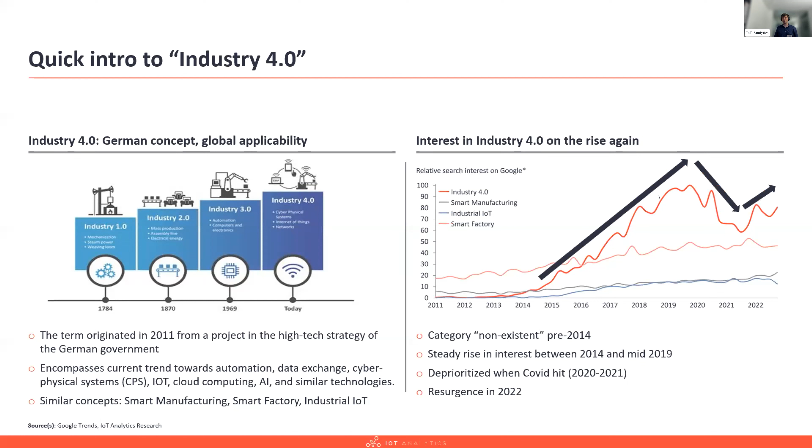One of the things we in our research always like to do is look at Google Trends, to see what topics people are looking for on Google, because it gives us an idea how hot the topics are. Industry 4.0 wasn't even existent on Google really pre-2014, had a really long period where it took off. Then COVID hit, and I think the topic was a bit deprioritized. We've recently seen a resurgence of all Industry 4.0 related topics, and you can see that in the searches. We're not exactly where we were at the end of 2019 yet, but we're getting there again. It's quite encouraging, I would say.

We've shown these before, but just for common understanding, Industry 4.0 means basically in the industry and manufacturing vertical, really looks at not only the tech stack, but also additive manufacturing, collaborative robotics, AR, VR, those things. IoT is a bit more clearly focused on the tech stack, but also outside of industry.

And then within Industry 4.0, I think it's always very important to clarify when you talk to someone: are they talking about their own smart operations? Are they talking about smart products that they are selling to customers? Both of them can be Industry 4.0, can be IoT, but it's two different worlds in many cases.

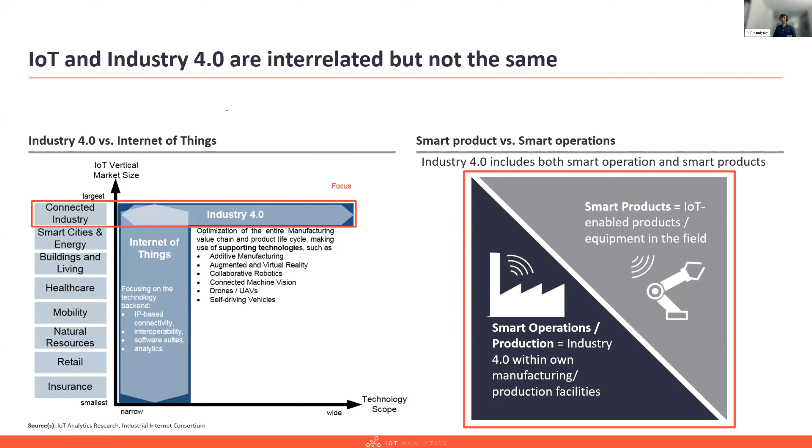With that, just as a starting point, we have some data that we're presenting today, a lot of which is from our recent Industry 4.0 adoption report we released in October. We surveyed a number of manufacturers on Industry 4.0. You can read a blog about it on the website, and if you're a subscriber to our research, you can see the entire thing and look at the data. I'm presenting a few snippets.

Before I present snippets of that report, I think it is relevant for everyone to see how bad the current economic environment is for Industry 4.0, simply because we are bombarded in the media by news about a downturn, about inflation affecting us, and just a bit of data from our research desk.

One being job data. We index the amount of open positions for Industry 4.0 related jobs to November last year. So you can see topics around cloud, IoT, platform, and we did this where we have more research.

That leads us to conclude that yes, they are declining, but not to a degree that we have to say we're majorly worried.

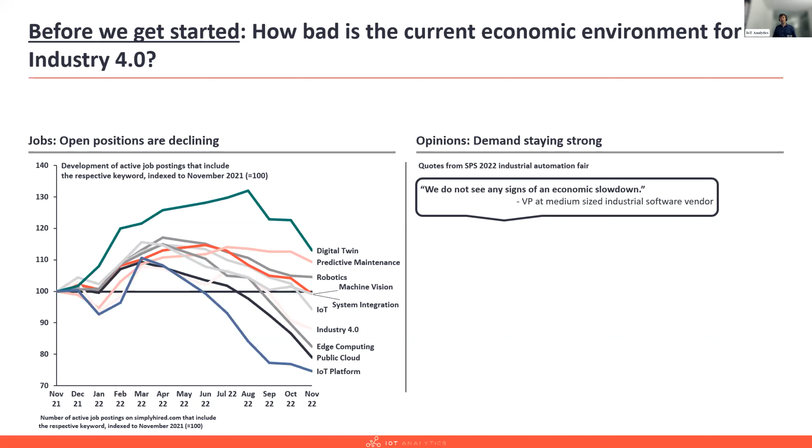Just to give you some feedback from last week's SPS fair, the Industrial Automation Fair here in Germany, we interviewed a number of people and asked everyone what's happening with the economy. We're actually releasing a report next week with our takeaways from the fair. An industrial software vendor told us no signs of economic slowdown whatsoever. A large industrial automation vendor said no downturn visible, though they were a bit worried about a continued shutdown in China affecting things, but not really.

Industrial connectivity companies said they're seeing some churn, and some customers asking for discounts, but overall it's going well. And then another medium-sized automation vendor said they don't see any real signs of a slowdown—in fact, the exact opposite. He said they used to have 3 to 6 months visibility on their order book, and now their orders are filled for the next 2 years. So I had extremely positive feedback from various people that I think is genuine.

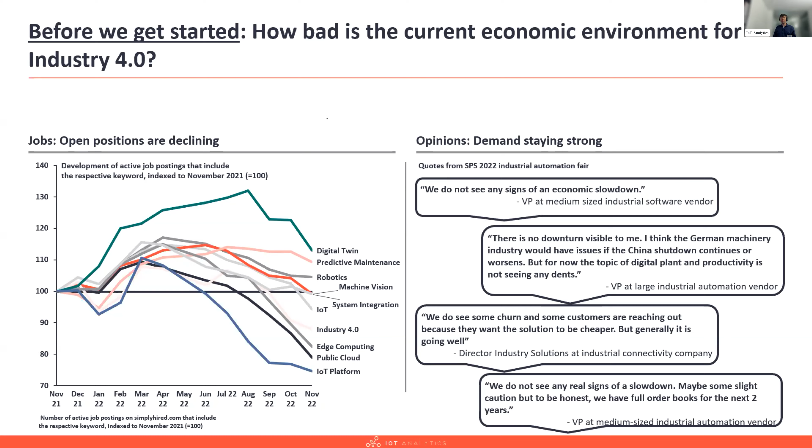So our conclusion is that even though there are clearly pockets of weakness, generally speaking this whole Industry 4.0 world, and also looking at the Google Trends chart which was going up, it's not really that affected. And you may ask yourself why, and I think we have some answers to that in our data.

First of all, 72% of manufacturers we surveyed have a smart factory strategy. A lot of them also have an IoT strategy—some of these may be synonymous, some may not. 53% have an AI strategy, and some have a smart connected product strategy. You may note some have no plans at all for this, because in some industries, like chemicals, it's a little difficult to produce smart connected products.

The interesting part is that the ambitions for the next years are really high. When we asked about a bunch of different KPIs for these companies, and looked at the average KPI improvement people claim they've had over the last 3 years, they said they've improved the average KPI 15%—so not 15 percentage points, but 15%.

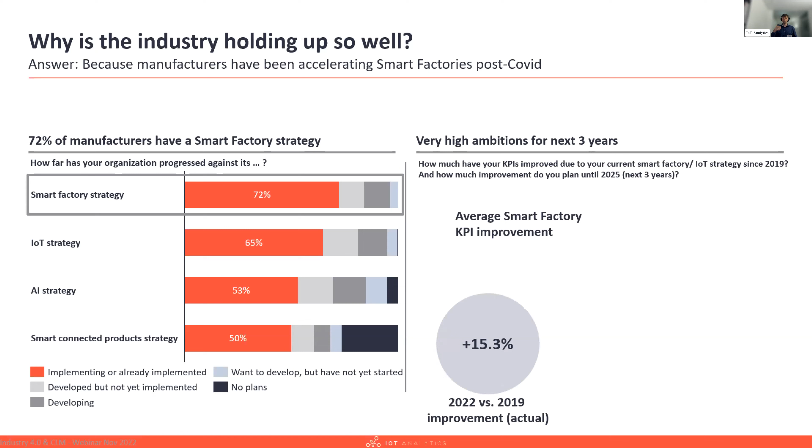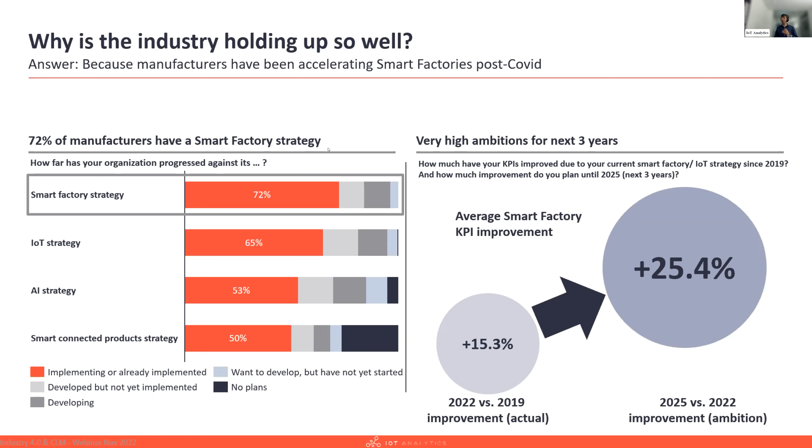When we asked them what they plan for until 2025, they want to improve every KPI. Obviously they have different KPIs—some can't be improved that much, some more—and on average, by 25%. So you see companies have much higher ambitions than what they achieved in the last 3 years, and I think that is probably one of the reasons we are seeing this growth.

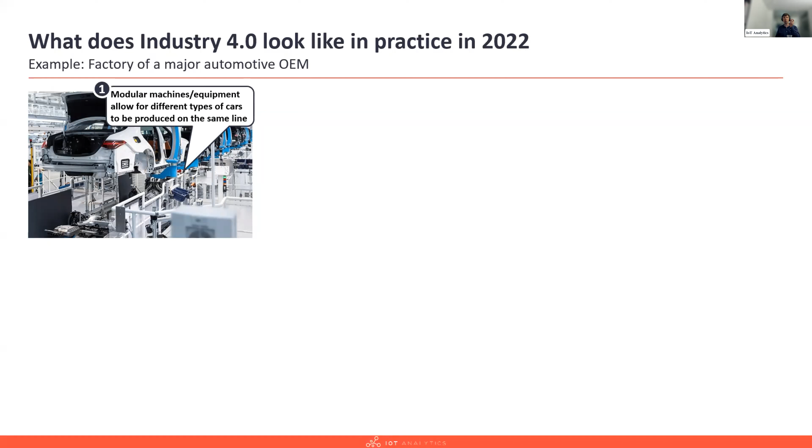The second thing is digital worker instruction, and generally this is leading to paperless operations. You used to see paper all over these products and parts and whatever—none of that now. You have these small automated guided vehicles, in some cases autonomous robots, feeding the line with parts. That's become very normal. And you have cloud and browser-based worker assistance software tools that have, in this case, the ability to alert, document quality defects, and feed into the KPI dashboard.

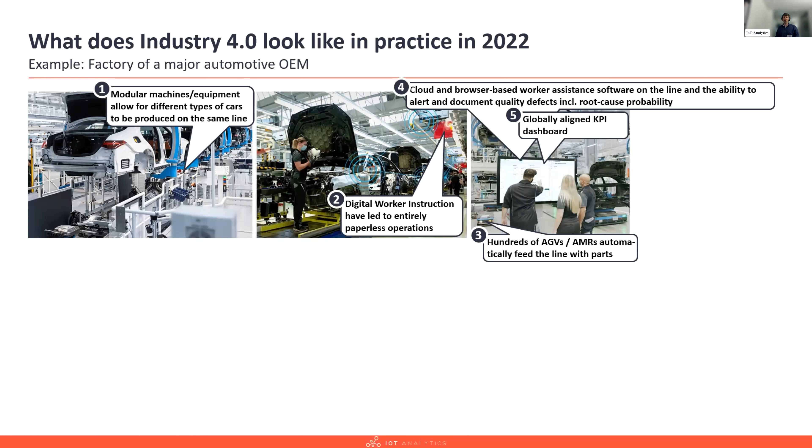And the KPI dashboard in this specific case is globally aligned in all factories, from the CEO down to the worker. So the CEO of the board essentially has the ability to click down through to every plant on every level, which is thanks to the cloud and this being a globally aligned tool.

And then what I think is actually quite interesting is that you have bi-weekly software updates at this point. So if you want to improve something, in 2 weeks you'll have an update. In the past, we were looking at this just being one-off software.

Mobile handhelds, so the worker themselves can enter quality defects and take pictures, get information, leading to engagement. The cars all have tags that allow you to see where in the factory is which car that has not been produced yet. That's via UWB technology in this case.

You have a very sophisticated MES system that needs to coordinate hundreds of individual shopping carts that are made to order and then sent to the individual car at the line.

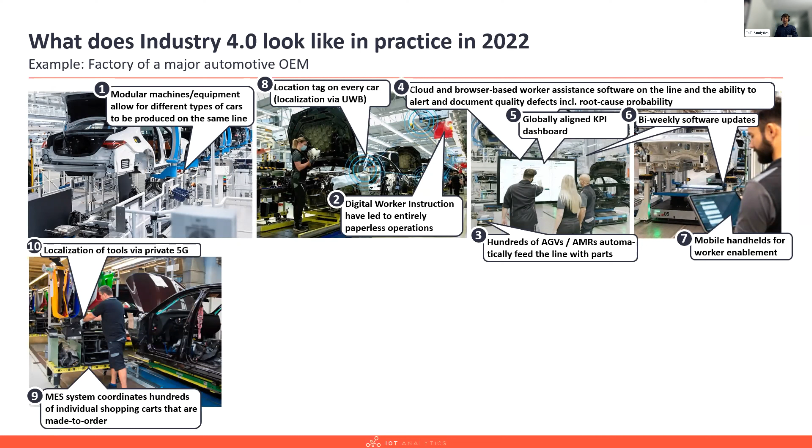You can localize specific tools like drills or something via private 5G, so you know where they are. The body shop is entirely automated with robots and with machine vision systems for robot guidance and fault detection.

And then we are talking about digital twins that allow people to simulate production upgrades. Or in this case, you want to move the arm from here to there - what would that mean? And not to forget, sustainability is playing a bigger role.

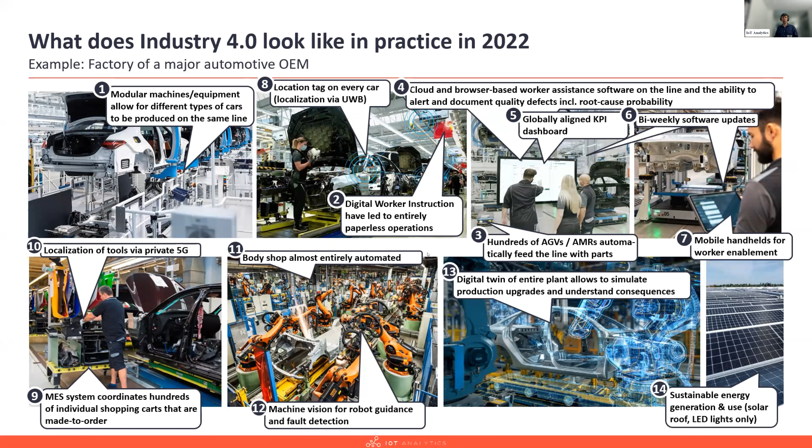In this case, the company that we were looking at, the entire roof is made out of solar, so they're essentially powering their entire plant. They're using LED lights, more efficient, and so on. So that gives you an idea of what's happening in the industry out there.

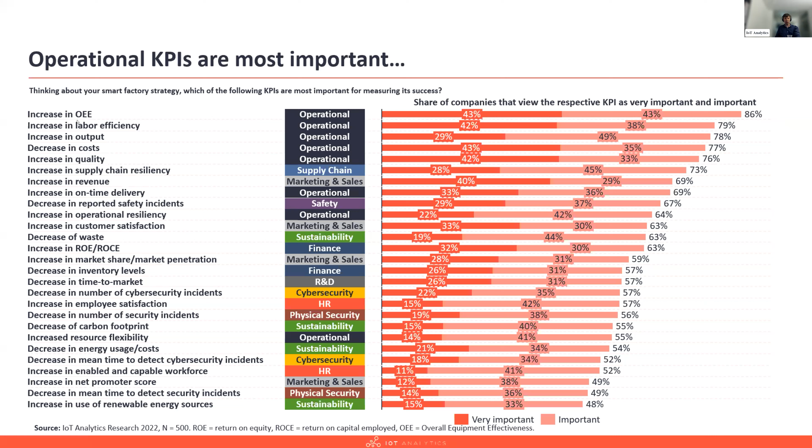In terms of the KPIs, I am actually going to jump a little bit because I don't want to go into every detail here, but OEE is the number one KPI across manufacturers, but there are a lot of other KPIs. And the interesting part is...

Some of these KPIs - this is kind of the 15 and 25% I was talking about earlier - some KPIs just have more weight in it than others.

I also want to quickly talk about the challenges, because that has changed as well. This is the only external data I'm sharing, and this is not from us.

And this really reflects also what we are hearing from different people who are having major issues with, first of all, getting the talent and retaining the talent, but also combining all these different technologies into a scalable and seamless experience.

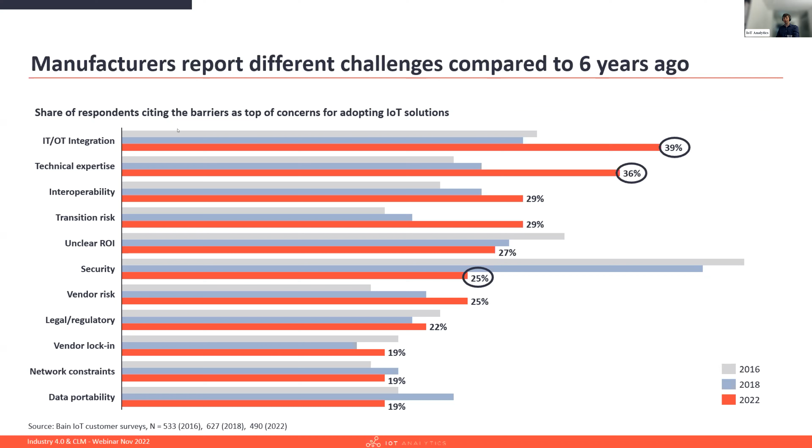I'm going to jump these because for time reasons. So I do want to get into closed loop manufacturing and related topics.

Now, we talk about Industry 4.0. There are a lot of related themes. And from our research desk, I would like to give you a couple.

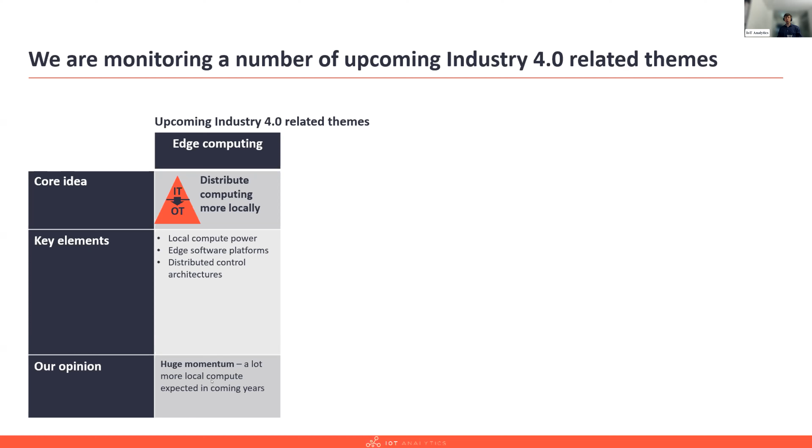There's edge computing. The core idea here is that you distribute the computing more locally, and you have things like edge software platforms. That was one of my biggest takeaways from SPS last week - how every hardware vendor is really looking at their edge software platform setup, distributing compute. We see huge momentum in this whole edge computing space, having more local compute.

There's the topic of IT-OT convergence. The idea is you seamlessly integrate IT and OT technologies - things like containerization of OT, low-code tools, IT-based development environments to have PLC programming code.

At the same time, the other way around, digital twin of an OT asset. Again, huge momentum - we're seeing a lot going into this area.

There's the whole topic of AI and IoT together, AIoT, machine learning. I would say not as big a momentum, but there's quite a bit going on there as well.

And this is where I would place closed loop manufacturing. It's yet another way of looking at optimization with Industry 4.0 tools. But the difference here is you're not looking up and down the stack, you're looking along the value chain from design to utilization, how you can close loops and make things better. We are seeing some momentum. I would argue it's a bit overlooked by some because it's a very interesting way of looking at things. It's also a bit similar to the concept of digital thread, which doesn't specifically talk about loops, but talks about having one single digital thread throughout the process, which allows you to loop back. We'll get to that on the next slide.

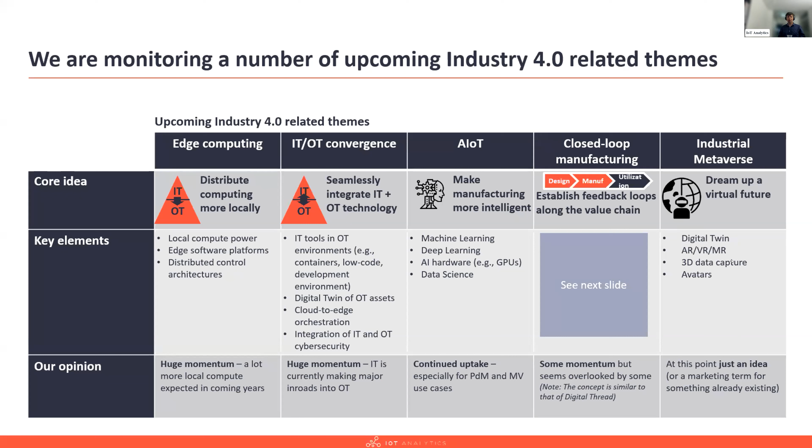And then lastly, I'm going to put another upcoming topic on here: industrial metaverse. There's still a little bit of ambiguity what this all means, and different vendors are using it in different terms. At this point, in our view, it's just an idea or a marketing term for something that already exists, although it is being used by some companies now to talk about the future and dream up what the virtual future looks like.

So today we're looking specifically at, we don't have a lot of time, one hour. So today the topic is closed loop manufacturing.

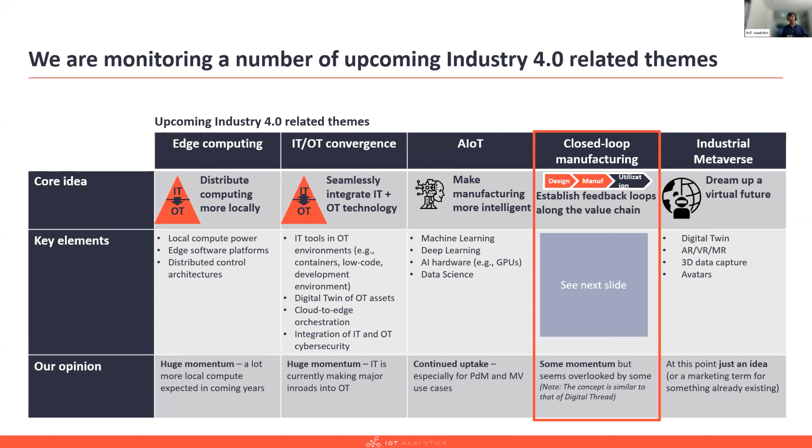And as we're going to closed loop manufacturing, I do want to talk about, first of all, what does it mean? So closed loop manufacturing, if you look at the product journey from design, engineering, manufacturing, quality, supply chain, utilization, and then perhaps field service or maintenance, there are loops, if you can.

Ideally, in a closed loop environment, whatever you have in quality feeds back into manufacturing or engineering or design. Whatever the customer says when they utilize the product feeds back again into manufacturing, engineering, or design, or whatever the field service technician says feeds back into manufacturing, engineering, or design. So that's generally the idea of closing the loop, allowing yourself to work with data as you go through.

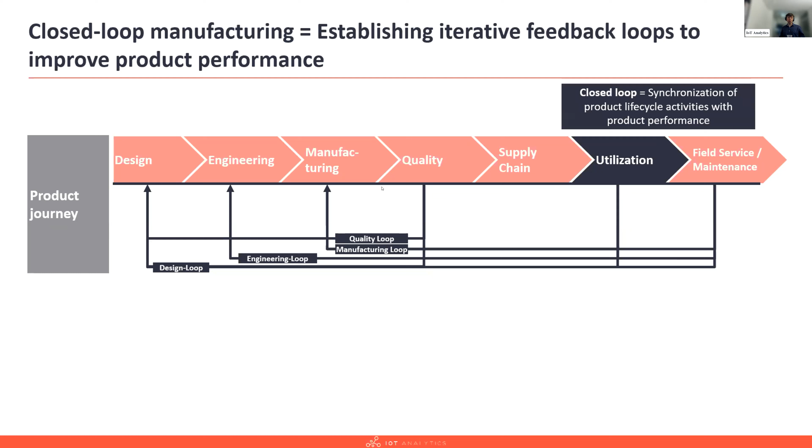So closed loop is the synchronization of product lifecycle activities with product performance. There are a number of key tools for closing the loop, mostly existing general software. So you have CAD for design, you have CAE for engineering, you have MES for manufacturing. You could feed some of this into your ERP. You could have an IoT platform, a bit more modern. Your product lifecycle management is part of this. Digital twin plays a role, and data analytics plays a role.

And the whole thing, why are you doing it? With the goal to improve product quality, reduce scrap, increase customer satisfaction. And so today, we don't have a lot of time, but we're going to have a specific focus on the part that sits between manufacturing and quality.

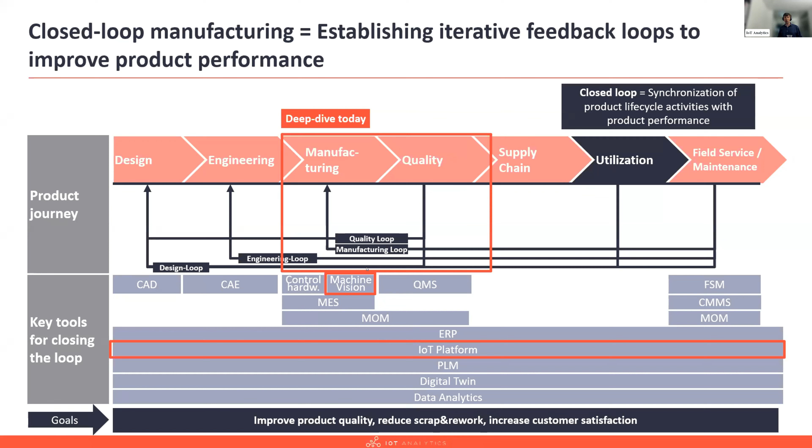We do want to highlight the topic of machine vision, because it's something we are currently doing quite a bit of research on. Fernando has been working on that. And we do want to highlight the topic of IoT platform, again something we have been researching quite a bit. But Raphael is going to talk about that as well, because they also use an IoT platform for their closed loop. With that, I hand it over to Fernando.

Thank you, Knud. Hello, everybody. So yes, we've been working on the topic of machine vision, and to set things clear from the beginning, we want to first share what we talk about when we talk about machine vision.

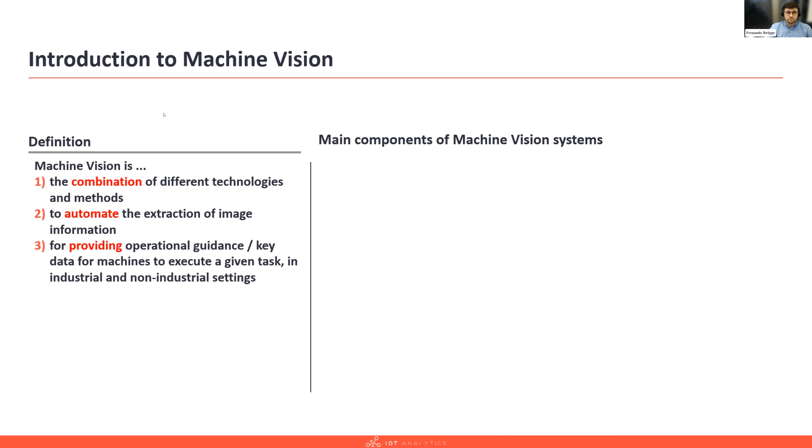So we consider machine vision as the combination of different technologies and methods that enable the automated extraction of image information for providing operational guidance or key data for machines to execute a given task, either in industrial and non-industrial settings. So here we have a short example of the different main components that we have in machine vision systems.

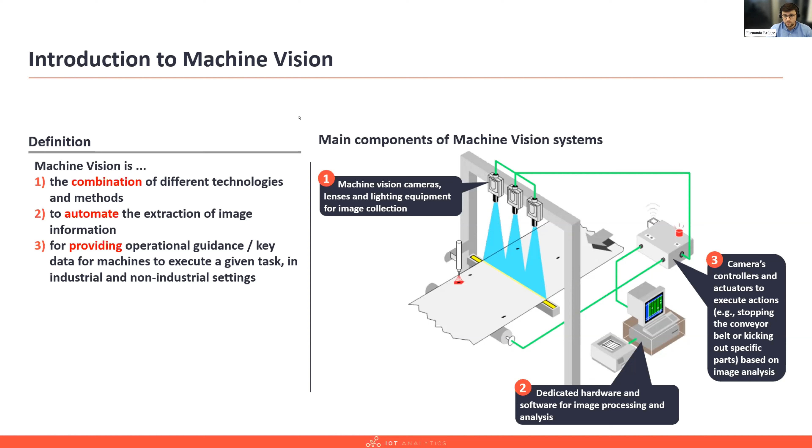So first we will have the machine vision cameras, lenses, and lighting equipment for collecting the images. Then we will have the dedicated hardware and software for processing and analyzing the images. And then a third main component are the camera controllers and the actuators to execute these actions, either stopping the conveyor belt or kicking out some specific parts based on the image analysis.

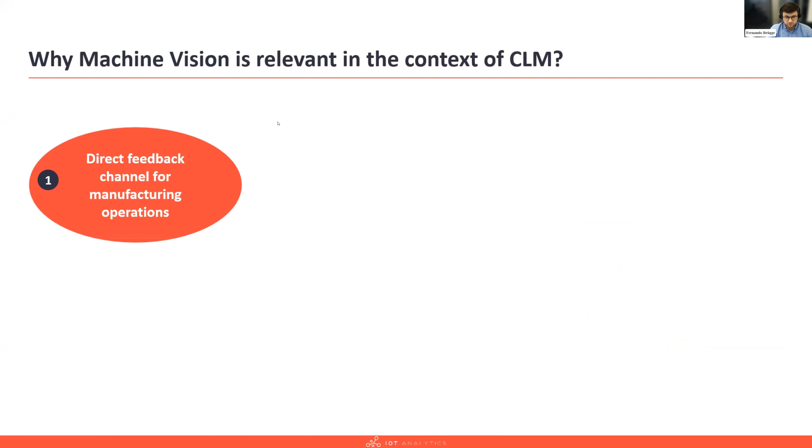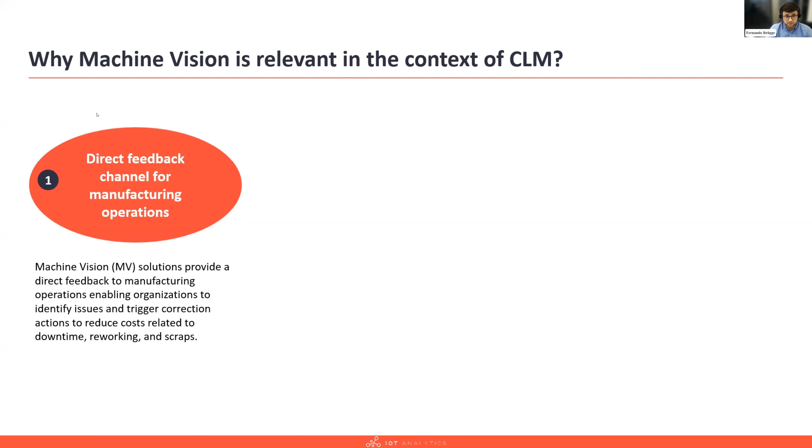Now, moving to the next slide: why is machine vision relevant in the context of closed loop manufacturing? We identified three aspects. The first and most evident is that machine vision provides a direct feedback channel for manufacturing operations, helping organizations identify issues and trigger actions to compensate and reduce costs, like downtime or reworking faulty parts and scraps.

The second main reason is that machine vision solutions provide an accurate and reliable quality control system. Compared to manual checks or traditional quality inspection, machine vision can enable continuous, repeatable performance 24/7 at 100% accuracy, at speeds the human eye cannot match.

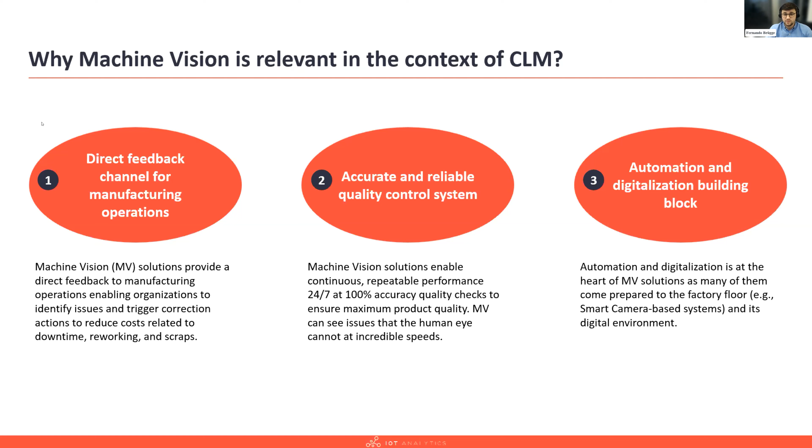The third reason is that machine vision is one of the key building blocks for automating and digitalizing manufacturing processes. Automation and digitalization are at the heart of today's machine vision solutions, since many of them come already prepared for the factory floor or adapted to specific digital infrastructure.

A last insight we collected from our investigation is that machine vision ranks as the top ROI use case in all our surveys, mainly driven by recent advancements in AI, edge compute, and image sensors.

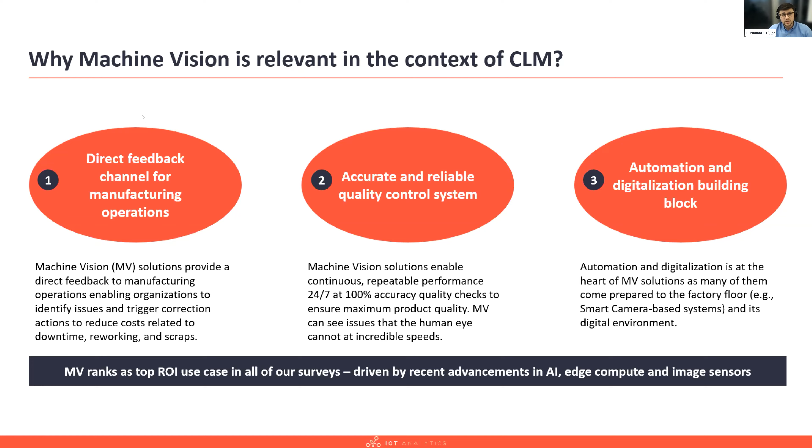Now we've prepared a short example of how machine vision could enable closed-loop manufacturing. In this case, we have the French company Numalliance, which produces CNC bending machines and developed a fully automated tubing production, inspection, and correction system.

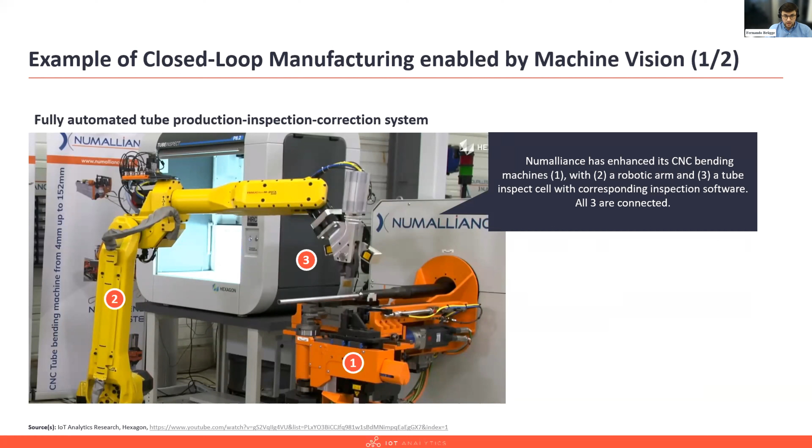The company enhanced their machines with a robotic arm and a tube inspection cell with its corresponding inspection software, connecting all these parts together.

The system works in a way that metal tubes are first bent with the CNC machines, then picked and placed into this inspection cell or chamber by the robotic arm, shown here in yellow. Then the system in this cell inspects the parts using 3D cameras.

If the system finds a defect in the bending profile, it automatically sends batch correction data to the CNC bending machine and reboots the entire machine bending trajectory without any operator assistance.

One interesting fact, related to what we highlighted previously on why machine vision is relevant to closed-loop manufacturing, is that the inspection system comes with some factory floor ready features.

One of them is that the cell comes equipped with a 3D glass reference surface to accurately track and position the images, compensating for environmental factors.

For example, high temperature could cause cameras to move, which could affect the accuracy of the image positioning or the calculation of the bending of the tubes.

Another feature the system comes with is a troubleshooting mechanism to flag whenever a camera is blocked or dirty.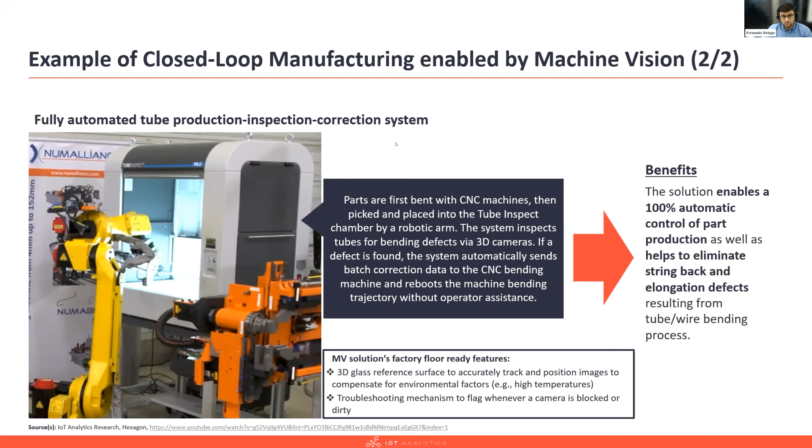Now we'll hand over to Raphaël, who is going to explain a little bit more about closed-loop manufacturing. Thanks.

Thanks, Fernando. We can see your screen, Raphaël, but we can't hear you yet.

Hello everybody, I'm very happy to welcome you today to my part of the presentation about closed-loop manufacturing. I want to rebound on the fact that Knud explained the actual situation of the jobs in the Industry 4.0 context. I think the situation is not so bad, and the reason is we are now facing instability in our general situation.

If I talk about COVID, war, supply chain issues, or an energy crisis, I think those topics are even more relevant today for manufacturers to be more accurate, more efficient in the production process. That's also a reason why today people in this field are looking more and more at what solutions can help them become better.

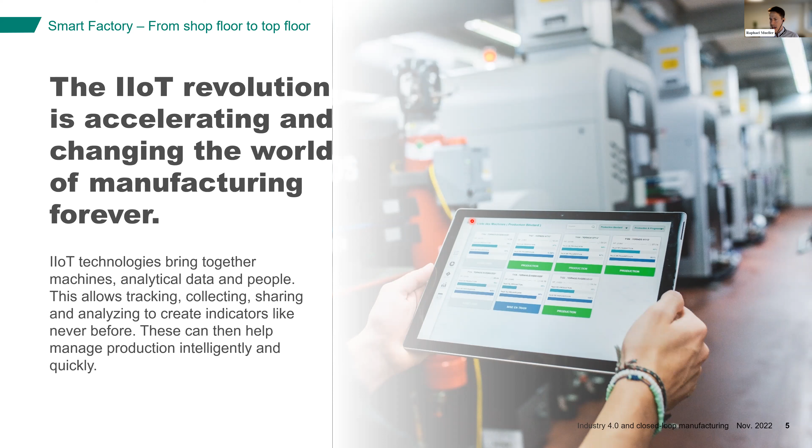Now about IoT, or more precisely IIoT - Industrial Internet of Things. At Brütsch-Rüegger, as an integrator, we really think this revolution will accelerate and change the world of manufacturing forever. There are many technologies available today that allow us to connect machines, but also people, to track data, collect data, and share that data. We also have powerful analyzing tools, and at the end of the day, these insights help us manage our productions - or the shop floors - more efficiently, and take decisions faster, based on real data.

We're seeing a move between something everybody knows - MES, Manufacturing Execution System, which is the traditional way to streamline operation and production at the shop floor level. This is seen as a monolithic system, meaning it's hard integration, a silo, going deep into the process but in a vertical way. Compare that to IoT platforms, which have been on the market for maybe 5 to 7 years - they're much newer in this game.

They are really new in that game, but they have another way to be integrated into this architecture - not vertical, but horizontal. We can see them as an umbrella over the whole company, allowing us to much more easily integrate different types of services, equipment, or software. When we see this at the opposite of the monolithic integration, we see it as a joint architecture. I'll try to explain where the differences are between these two main topics.

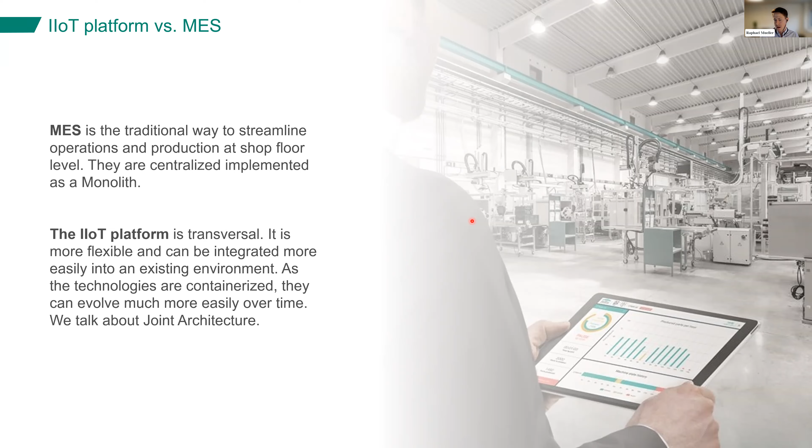Looking at the architecture as we know it, I'm not really sure IoT platforms will replace MES. MES are already very well integrated and have a very deep understanding of the process. I think IoT platforms will run parallel to that actual architecture - bringing new solutions, with the transition from MES to platform being smooth and taking time over the years. It won't be that a customer says 'I want to exchange my MES with the platform' - it will be more of an evolution.

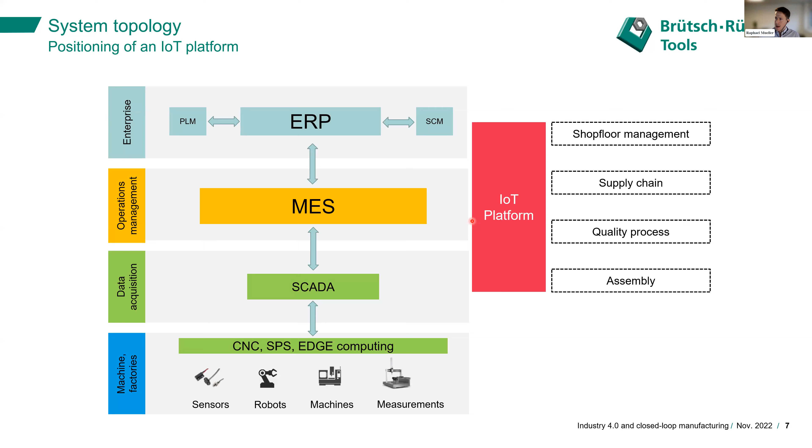And then after that, we will see which system will take the biggest place in this architecture. If we compare them with some insights or key facts, the IoT platform is really seen as a joint architecture between microservices, not only at the service level or apps level, but also at the edge level. So every object is seen as a different data source, and we try to connect all these equipments together, linked to a platform.

And then after that, all the data are at the same place. And thanks to this architecture, it will be much easier to integrate all the services on top of that. So it's really a kind of middleware. The platform is really transversal over the organization. And that allows us to have high flexibility through the microservices, just using the services we need and not the ones we don't need, instead of having a big software with a lot of features, and at the end of the day, just using 5% of them.

On the IoT field, we also have the chance to join two worlds: the edge and cloud world. So it's a kind of hybrid integration, and that allows us to use the cloud power that lets us, for example, do AI without needing a large edge infrastructure. So it's really a data-driven manufacturing environment.

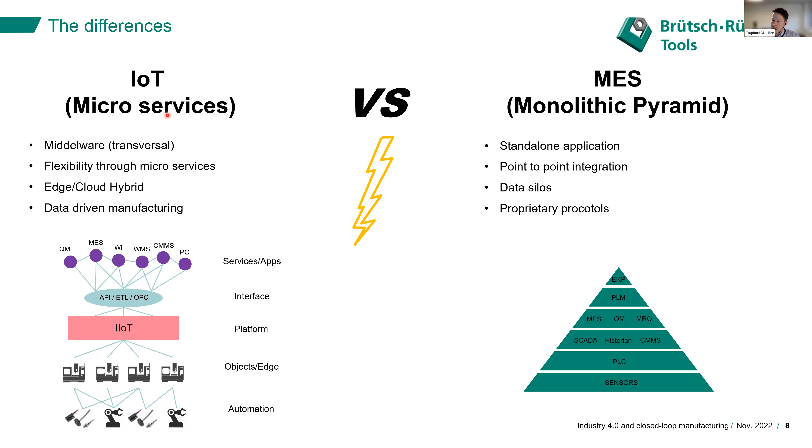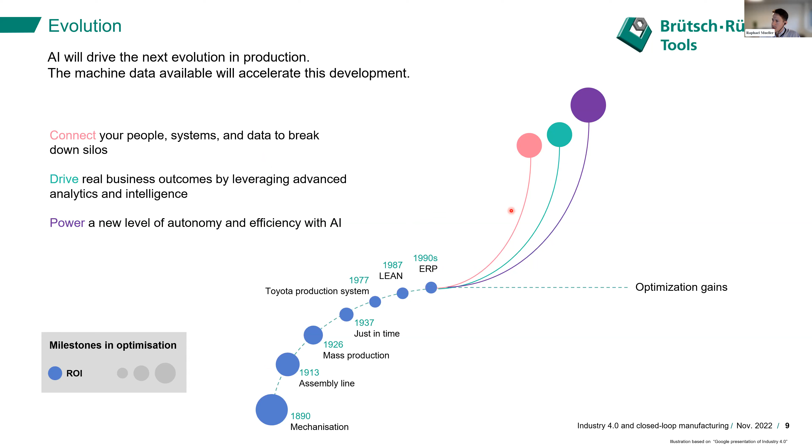So I wanted to point that out because I think it's a very good chart, and it shows how the evolution is at a turning point right now, and we're starting a new journey with some new technologies. There's also another chart I like to use when we start a project with our customer: this Industry 4.0 evolution chart.

If you look briefly at these 6 steps, of course we want to focus on the top of it, and we talk about doing predictive maintenance. Then we have adaptability, which is today's topic, with the self-optimizing closed control loops. But actually it's not possible to start an Industry 4.0 or digitalization project directly in that dark blue zone. We have to go through the different steps and do the work over there; otherwise it will never be possible to jump directly to the top.

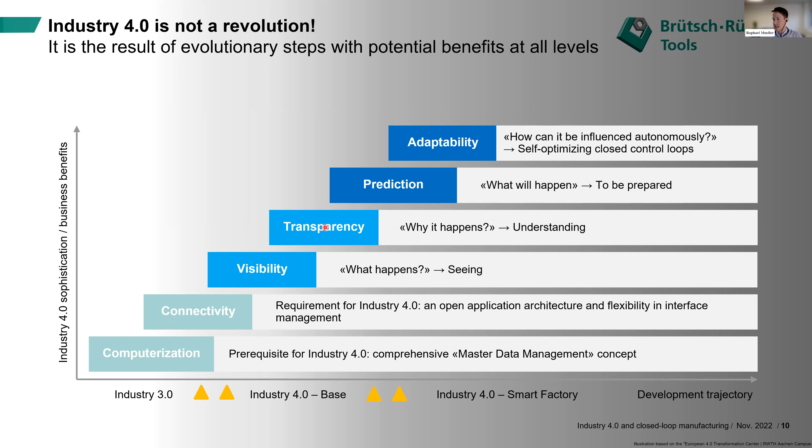We don't have to forget that each step has some business benefits, even the first ones. So it's mandatory to go through all those steps, to split the project into different phases. And of course, we need a vision. We need to know where we want to go, but we must never lose focus on the actual project. That's also a very important point.

I have another example I'd like to show you. It's a real example from a customer of ours, and I want to show the difference between facing a problem with real-time data versus without access to real-time data. Let's take our customer. In this case, it's the COO of a discrete manufacturing company, named Jimmy, and Jimmy received an order from a customer to produce 10,000 parts. For everybody, discrete manufacturing means production of single parts. There is no assembly process. So 10,000 parts to be produced.

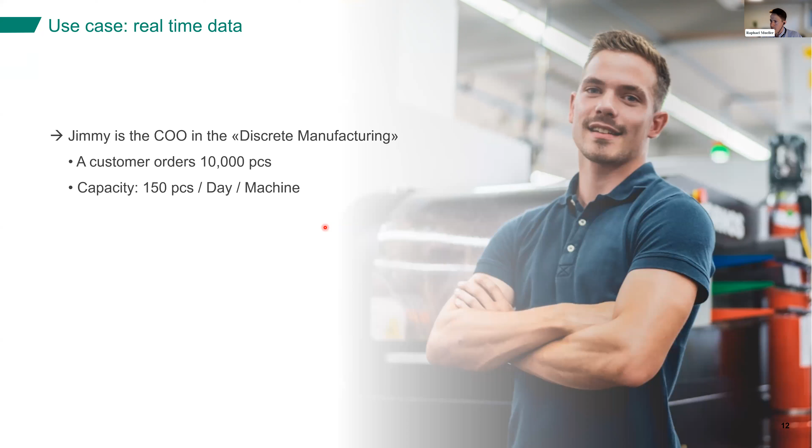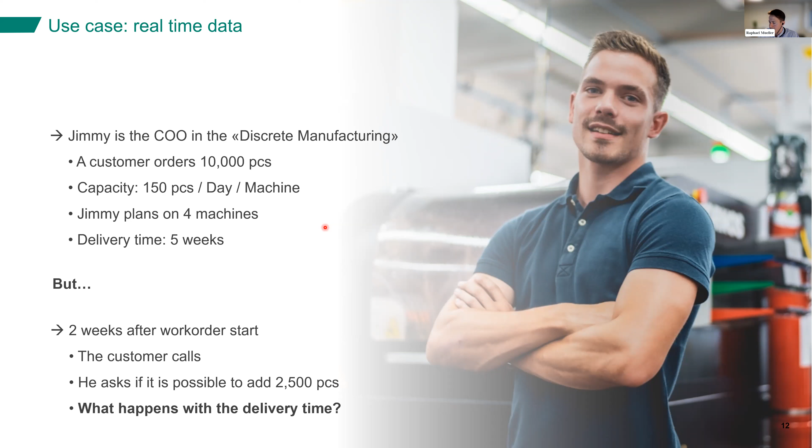He has a capacity for producing that part of 150 parts per day per machine, and Jimmy decided to plan this work order on 4 machines. That means he has a delivery time of 5 weeks. But as always, there is a but. Something happened: the customer calls 2 weeks after the start of the work order and asks if he could add 2,500 parts to that work order. So what happened? Jimmy has to check what will happen with the delivery time at the end of the day, if he'll be able to deliver those parts in the same time without having an impact on the other customer orders. So let's see what he will do.

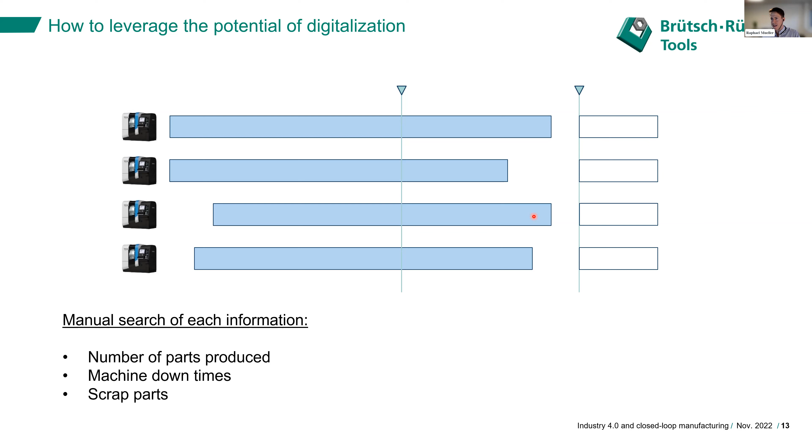In a first step, in an environment that doesn't connect the data or the machines, he would have a theoretical planning. So 4 machines, the work order started on these 4 machines, and he has to get the data from the people or from different systems. This is a kind of manual search process. He'll have to check how many parts were produced until today, what was the reason, because maybe he didn't reach the target he was expecting. He has to check how many scrap parts they produced in order to understand what room he has at the end to be able to produce those extra parts. So this job is possible, but it's manual, and he has to go through different kinds of information, put them together, and then at the end of the day he's able to answer the question.

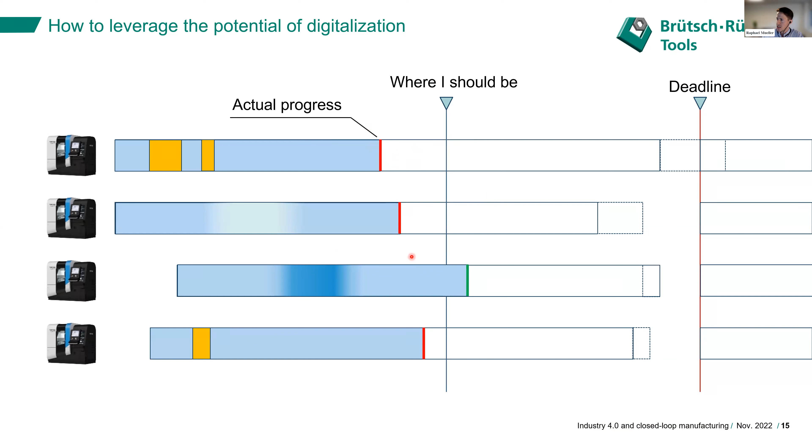Now what happens if Jimmy has access to real-time data? He'll have another type of planning, a kind of dynamic planning. The planning will show him where he should be right now at the moment, and it will also display the actual progress. We can see here we're maybe late on several machines, we're ahead of planning on some others, and we can also see the detail about this situation. So for the customer, it's much easier to understand: okay, this downtime was something expected, or this performance issue was also something expected. With all that data, at the end he has directly the answer: do I have the capacity to absorb this extra 2,500 parts? And I'm able to deliver those parts to the customer without having an impact on the deadline and on the next work orders planned on those machines.

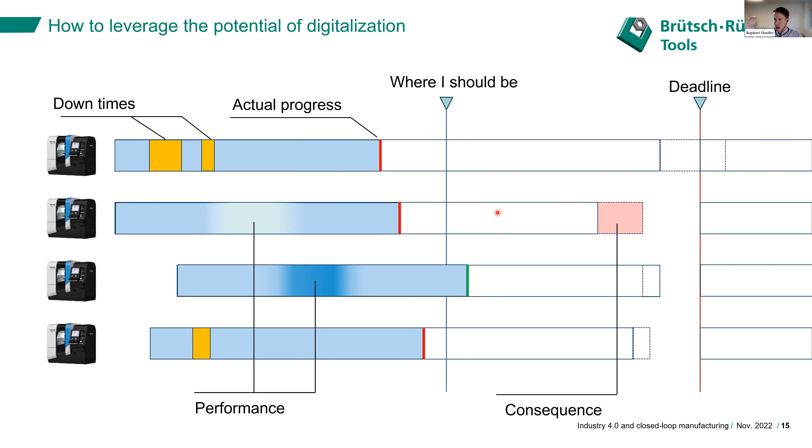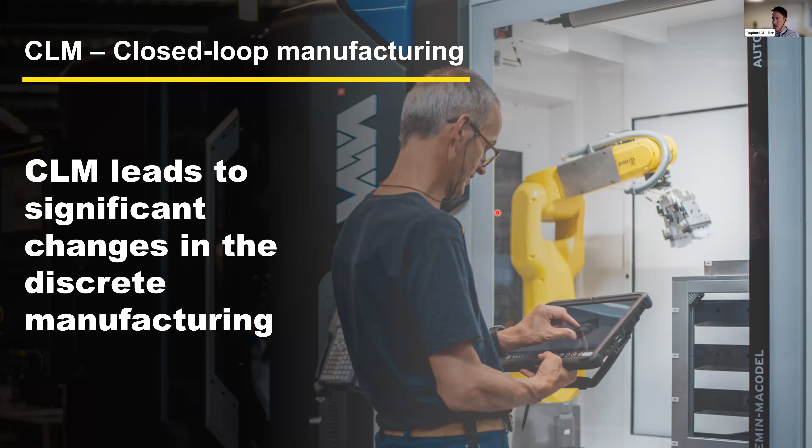So, closed loop manufacturing. For us, CLM will lead to a significant change in discrete manufacturing, and I'll try to explain right now why. Let's take a current adjustment cycle on a machine, again in the discrete manufacturing field, single parts production. So we have a part that will be produced in mass production. We're talking about several parts, machines running 5 or 7 days a week, 12 or 24 hours a day.

It's to understand if the process is stable and if my dimensions are still in the target, so if I'm not getting out of tolerance. At the end, the operator will have to check the result of the measurement process and calculate by himself if he has to adjust the machine. Then when he has calculated those offsets, he will have to input those offsets into the numerical control directly on the machine, and then produce again. So that's why we call this already a cycle.

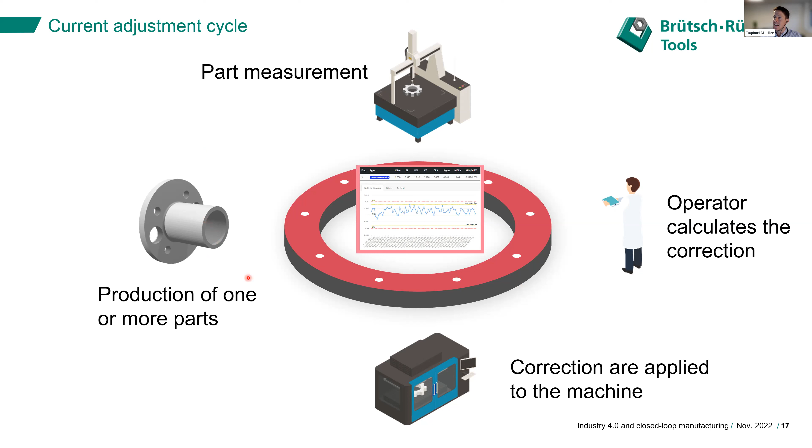And what are actually the point of failures? The operator has to input the correctors directly in the numerical control, so there is a risk of inputting something wrong. The operator has to calculate those corrections by himself, so there is also a risk of doing something wrong. And why are we facing that problem?

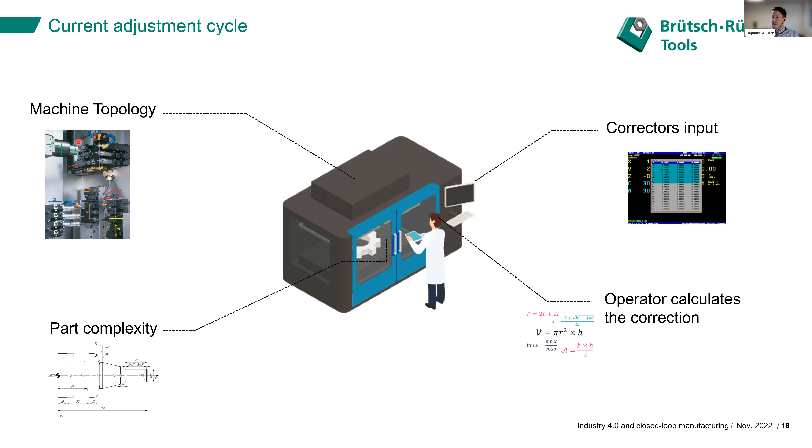It's also because the parts are always more complex. We always have more complex parts, but this is directly linked to the machine topology also. The machines are always more able to produce difficult parts with more axes, more tools, more options. That means the parts are complicated, and at the end of the day it's difficult for an operator to really have everything in his head to understand how he should correct the machine manually.

There is also something that is really well implemented right now: statistical process control, what we call SPC systems. It's by measuring parts at a certain time, each time of day, and then using those measurements and the history of that data to create statistics and understand exactly how often I should control my parts to be sure to stay within this average or acceptable area. This is totally based on statistical calculations, not really linked to machine data or something else.

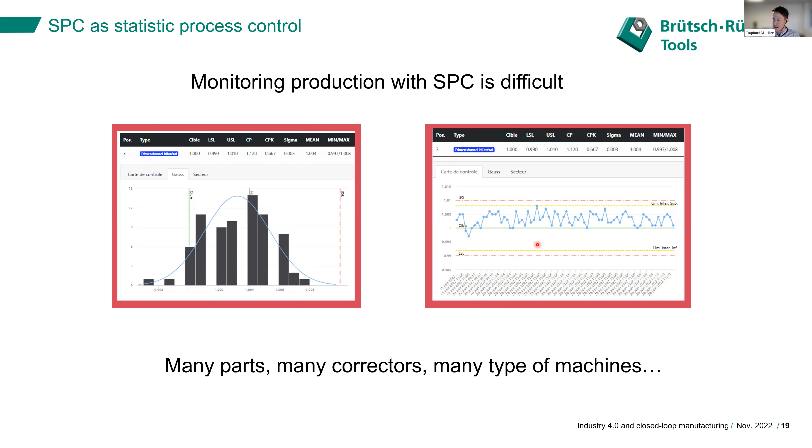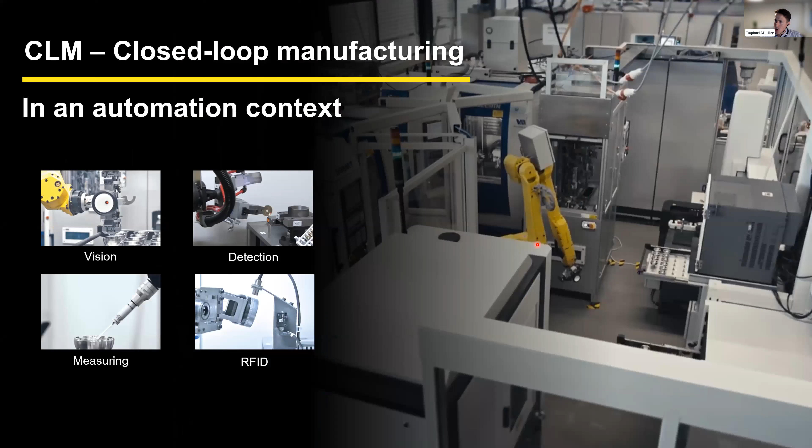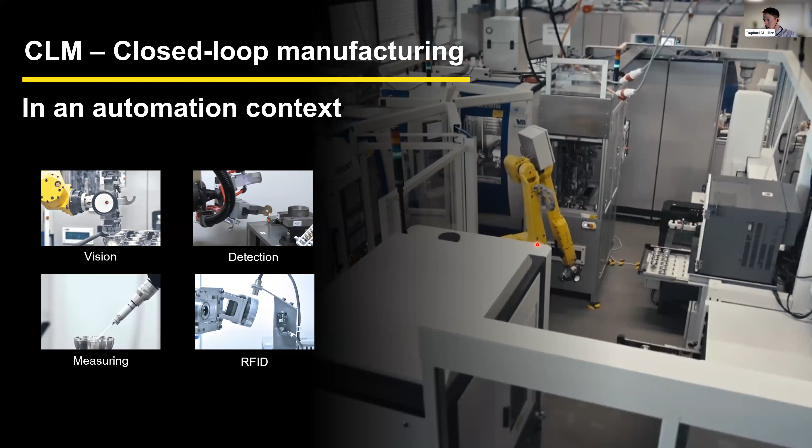Now we are seeing more and more closed loop manufacturing, where we are able to connect machines together, and this whole loop is getting more and more automated. I've chosen two contexts where you can see closed loop manufacturing. The first was mentioned by Fernando at the beginning of the presentation, the Alliance machine with a bending process machine, a hexagon measurement machine, and a robot. It's exactly this type of machine—an automation context with some vision, part detection, measuring tool, RFID chips.

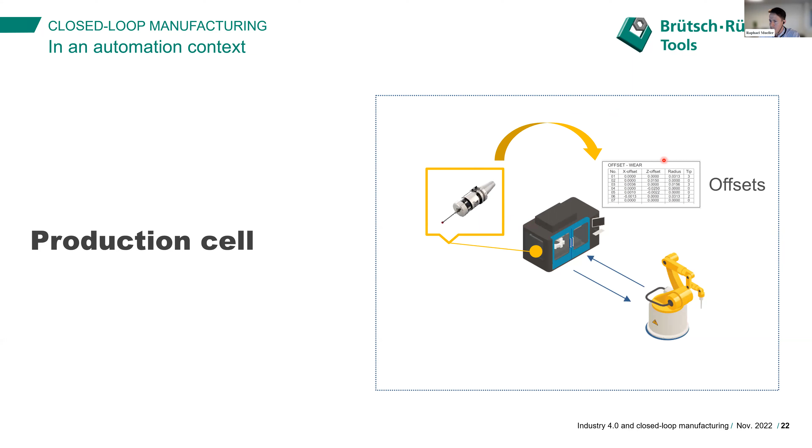This is something we've already seen for many, many years, so it's not really new. We call this a production cell. We have a machine linked to a robot, and a kind of measurement system. It can be directly integrated to the machine, or as in Fernando's example, another machine next to it. This system will measure the parts directly and will be able to autocorrect the machine if we are facing dimension issues. So this is a typical production cell, something already at production facilities for many, many years.

But there is another way to see closed loop manufacturing, and in an Industry 4.0 context this is totally different. Now we will not talk about exactly the same components—we will talk about machines, connected tools, master data management, and networked components. And that opens completely new doors.

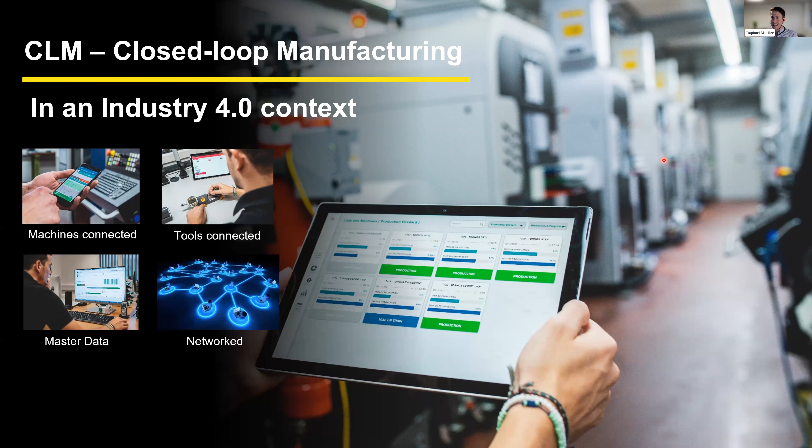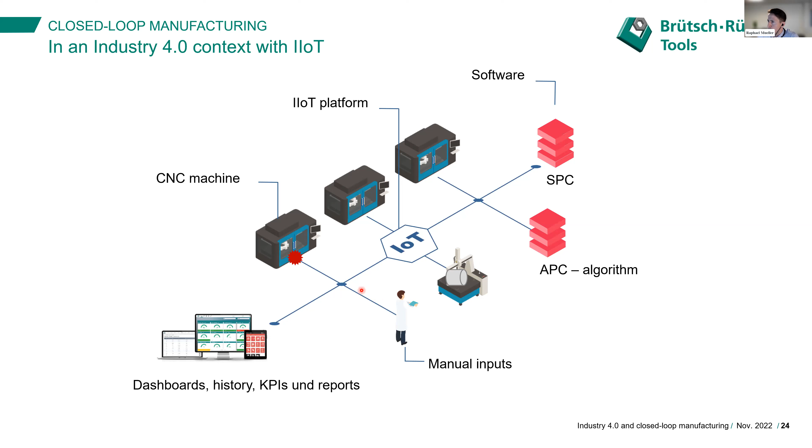The machine will produce a part. This part will be measured on a measurement system, and this system will generate data that will be stored into the QM system for history, but will also go to an algorithm, and this algorithm will send the correction automatically to the machine. So if you look at this architecture, it's not really talking about a production cell anymore—it's about making all those objects talk together and creating a cell with the whole shop floor. That's actually the main difference with closed loop manufacturing in the Industry 4.0 context.

Just to sum up and give the overview: on the left side of the screen, the first example, and on the right side, the digitalization example.

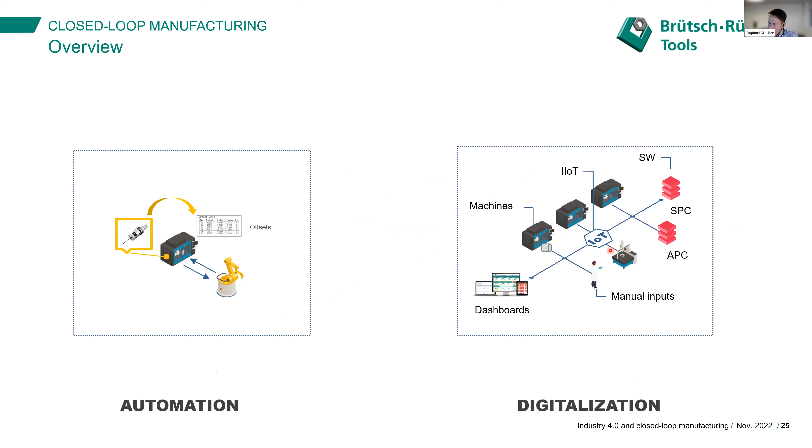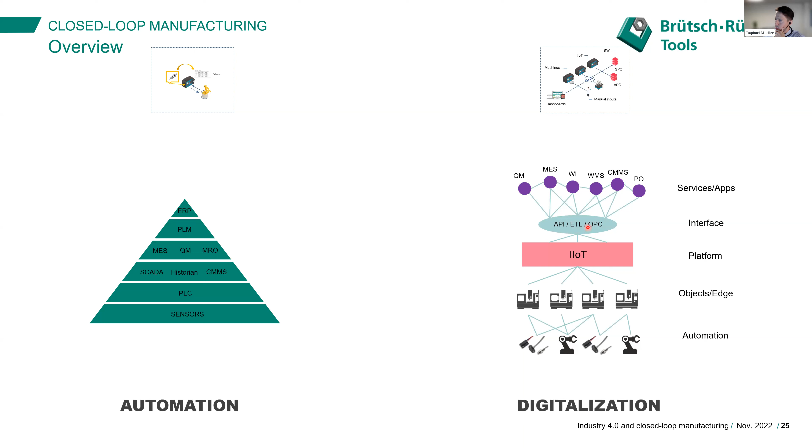If you remember my slide back in the presentation, we defined this concept of having a monolith on the left side of the screen, a standard way of integration. On the digitalization point of view, really talking about microservice philosophy. Everything is becoming a service or an object, and everything is working together. We don't have to replace or buy or create a new cell, we can use all those objects to make them work together. That's the real closed loop manufacturing concept we try to show to our customers.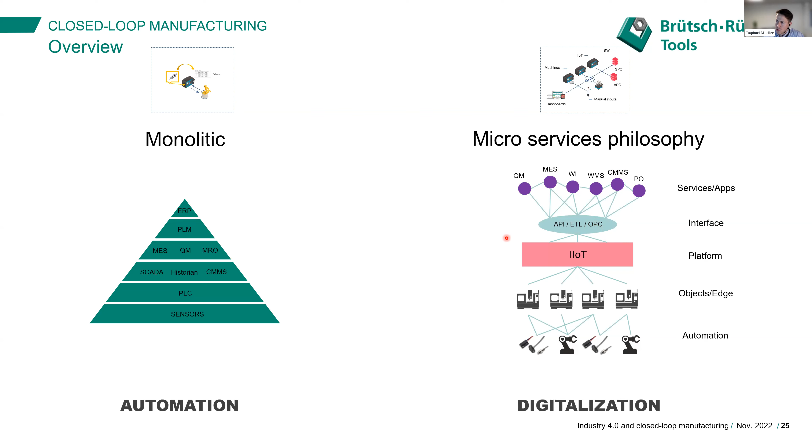I have tried today to put together some information about a use case. It's a customer in the watch industry. As you maybe know, the watch industry is a kind of market where people don't really like to talk together. There are a lot of secrets, everybody wants to keep their secrets and their manufacturing process.

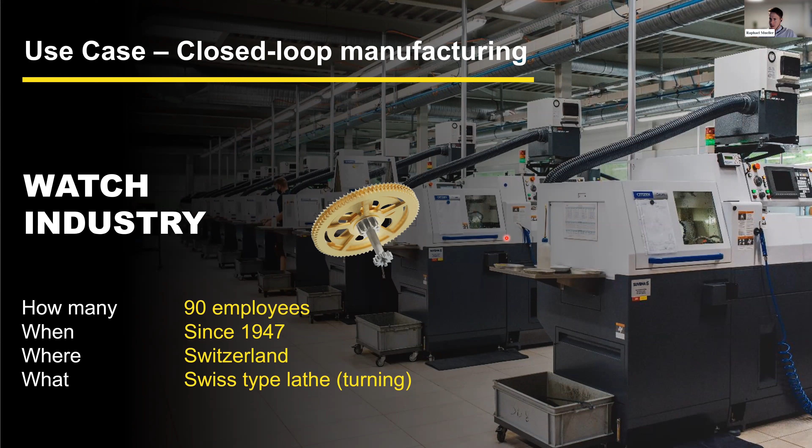But what I can say is this company has 90 employees, it's an SME, small and medium-sized company. It was created in 1947, based in Switzerland, and they are specially focused on Swiss type turning machines. For those who don't know, those machines run normally 7 days a week, 24 hours a day, fed by a bar, turning and producing parts as a mass production process. So machines that run the whole day.

This customer came to us and had several difficulties. He said, I have some parts that are always more complicated, so my operators have issues calculating this correction. I also have difficulty finding the resources. I think this is a worldwide problem, to find people able to fulfill those requirements.

Next to that, he also wanted to optimize his OEE, he had noticed there is potential to be improved. And he said, if that can be a side effect of my project, I want to go deeply into this topic also.

So let's take the integration process of that customer. A mass production of those watch parts, a machine park dedicated to those parts of 8 CNC machines, and some measuring equipment - again, not dedicated to a machine, but to a workshop, and several kinds of measuring equipment. Then taking the workflow, the part is produced on those machines, then will be measured on those equipments.

Next to that, an algorithm was implemented to replace the human brain, to calculate those corrections. This algorithm will ingest all this measurement data and provide the operator the optimal correction result. The operator can choose if he wants to apply them directly or modify them. Then by a mouse click, he just can send those data to the machines without a manual input.

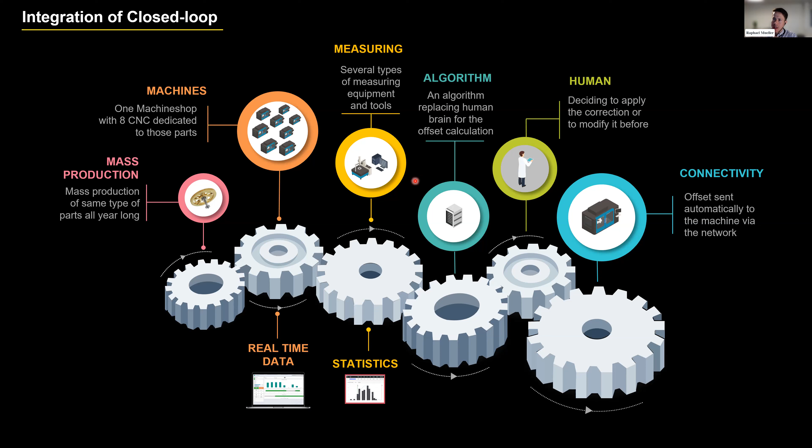And he also has all the statistics. When we talk about measurement, we have to store all those measurements, and all of them are also available in an SPC system. So this is a real closed loop integration based on the equipment the customer already had before. It's not a new production cell created specific for that project, it's really using the actual equipment and making them talk together for, at the end of the day, having a closed loop concept. So that was our use case.